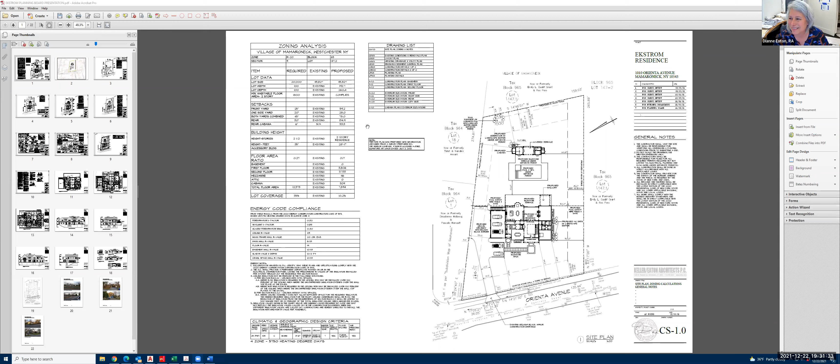So I'm the architect for the project, and my clients, Klaus and Cecile Ekstrom, purchased the property at 1010 Orienta Avenue.

We are proposing a single-family residence, a 2-story residence with a 1-story cabana. The house itself complies with all the Village of Mamaroneck zoning requirements in terms of setbacks, height, and floor area ratio.

Lot coverage. The property itself also came with certain covenants, which I did include in our submission. The first is that all structures have to be 50 feet off the right side property line. We need the front to be a minimum of 35 feet off Orienta Avenue.

There's a lovely stone wall with piers along the front on Orienta Avenue, and we could not touch or disturb those. So those kinds of parameters dictated the layout of at least a portion of the overall house.

So we ultimately kept the stone piers where the curb cut was and entered into this side of the house, which pushed the garage over on this side with the rest of the residence spilling out after. We have a bluestone terrace in the rear.

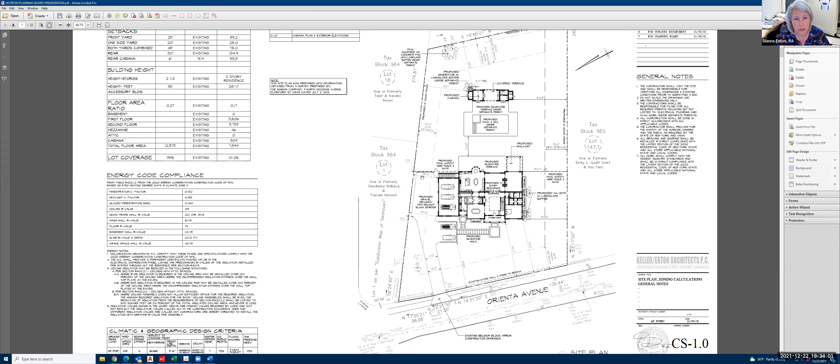I think I'm just going to keep going through the plans. We have Justin from Langan here if we have more specific questions. This next sheet is just an area map—highlighted here is the property we purchased in question.

Here is the proposed layout of the building with cabana. Just to give a sense of where the other houses are situated along Orienta, we are much further back than most of the homes along Orienta Avenue. We felt that was important given the property.

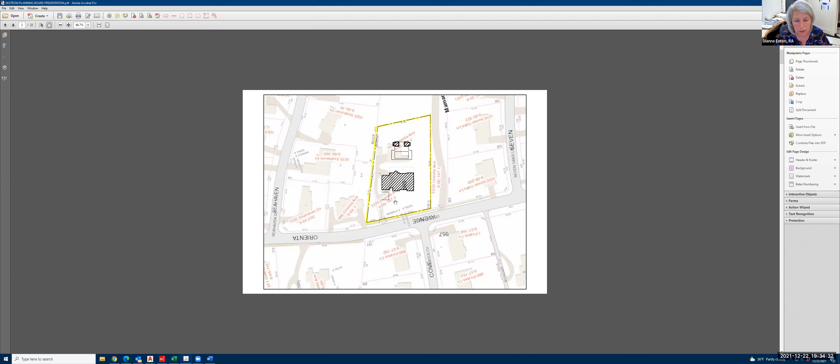Moving into some of Langan's drawings, which I'll give a brief overview of, and any specific questions can be directed towards Justin. This talks about some demolition work and grading that would need to happen. I'm just going to go down to the next page.

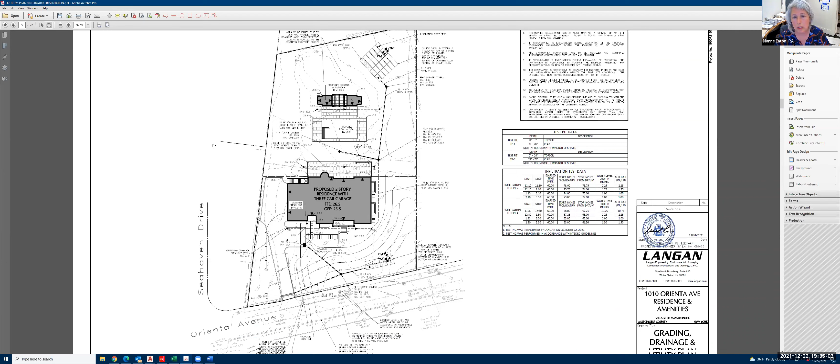We ultimately have—just going to keep going—this is for amenities and layout. This next one is a little more to the point about how we're going to capture any of our hardscape and roof leaders, et cetera.

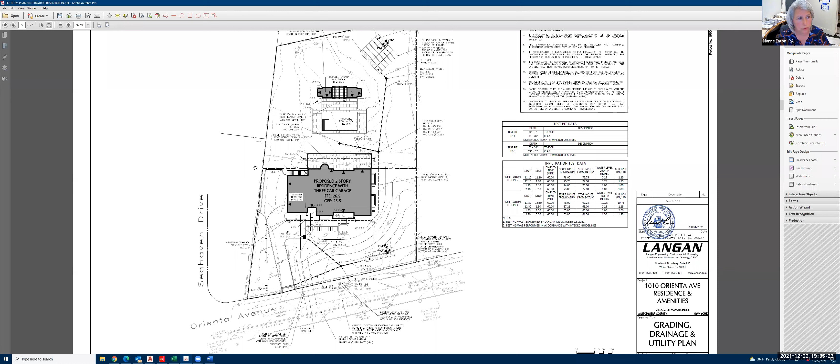We have 2 underground infiltration systems: a smaller one towards the front, which picks up the driveway surface water, and one in the back where we start picking up the roof leaders. I'm just going to keep going through the process here—a little bit more information there and contours.

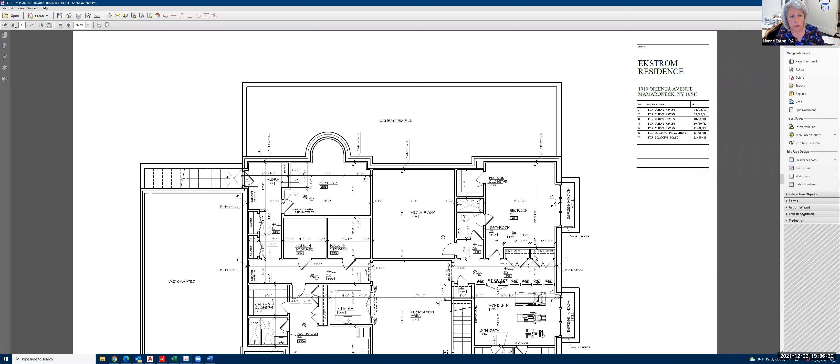The overall layout of the house—I'm just going to scoot up. There is a finished basement beneath the first floor, which has a media room, kind of typical for this area, media room, gym.

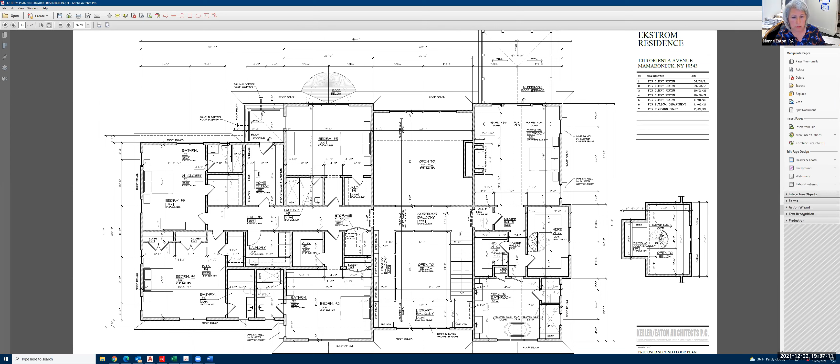On the second floor, all the bedrooms have a balcony overlooking some of the first floor spaces. And then I'll just get to the elevations.

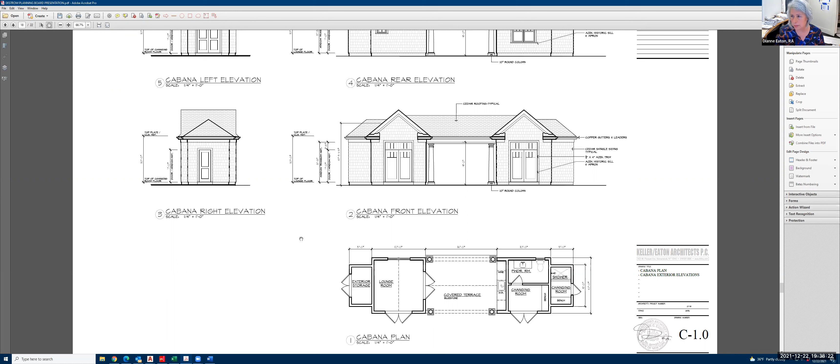And that brings us to the Cabana elevation, which is the one-story house in the rear of the property. They were very interested in keeping the pool and the cabana kind of more central. Everyone likes to make sure the pool is completely guarded and screened, etc, just so neighbors don't object to any kind of noise and along those lines.

I think that's all I have for you today. That's just a survey and some photographs of that wall we were keeping, lovely wall, and just some of the neighbor properties. This is the house to the left, this is kind of the side view of the house to the right, and just some neighbors across the street. Love to take any questions.

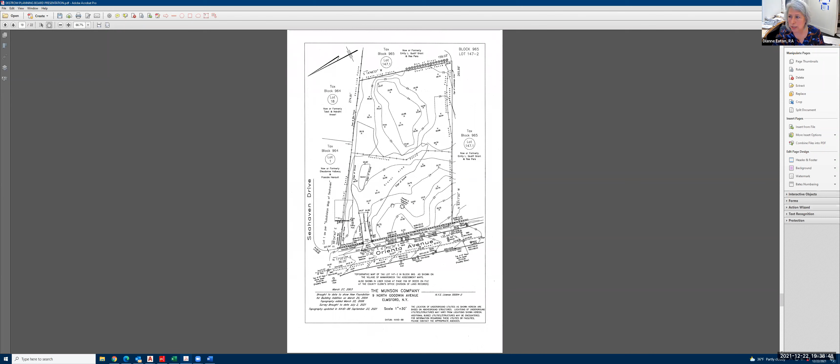Maybe the engineer wants to give a little bit of detail. Brittany, could you disable the comments, please?

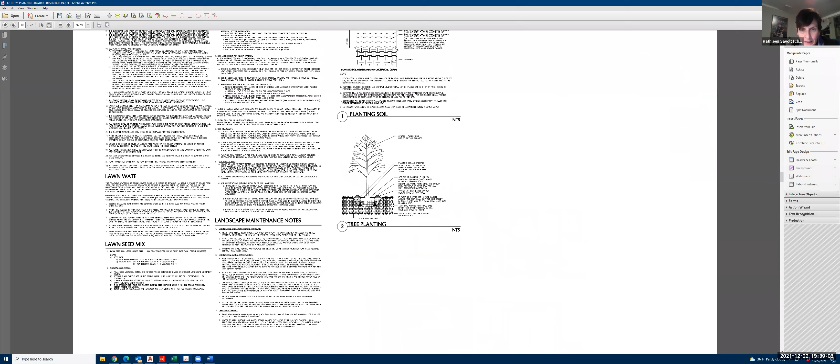I'm sorry, Gail. We're not at that level of detail at this point in time. We'll get there.

Okay, I'm going to just scroll back to the... yeah, if Justin from the civil engineer can do a little bit about the stormwater management system.

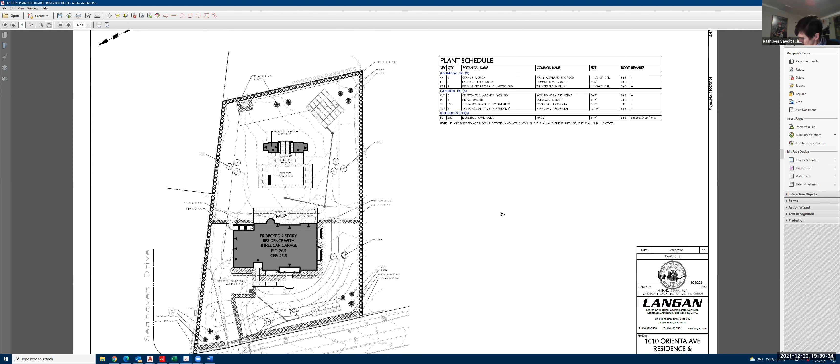Sure, can you guys hear me okay? Yeah, all right, let me try to. Justin, do you have a last name? Yes, my last name is McAlintal from Langan Engineering. Thank you everyone for allowing us to present today, this evening.

Just to provide a little bit more detail on the stormwater management for this project. Like Dianne mentioned, we're proposing two underground infiltration systems, one in the front and one in the rear. Most of the impervious surfaces from the property will be focused on the underground chambers in the back. We did perform field testing on the site to verify that the infiltration rates and depth to bedrock and existing groundwater do comply with DEC requirements. On this project, both of them do. We have the required depths, and the infiltration rate exceeds the minimum half inch per hour.

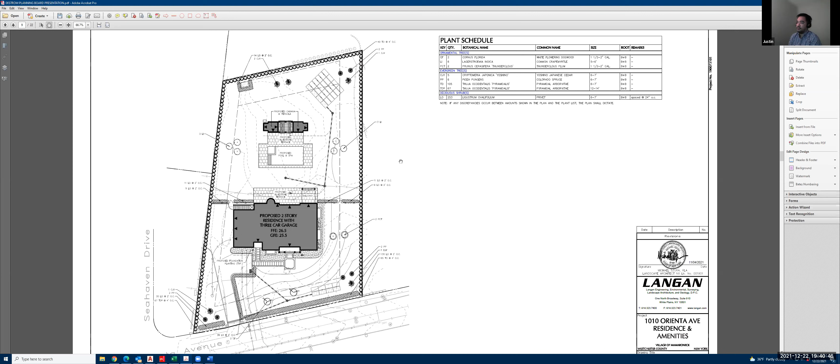Generally speaking, from a peak flow rate standpoint, our post-development conditions meet the existing peak flows, so we're not generating any more surface runoff that'll be leaving the site than what's currently existing. So in other words, you're not going to increase any runoff from the site than what's currently there? Correct, we're not proposing any increase in surface runoff. That's the purpose of the underground system.

We've gotten some written comments from the neighbors that since the vegetation on the property was removed, there's been an increase in runoff from the site onto their properties. So it's one of the concerns with regards to this project.

If I could just clarify one point, my client purchased the property as is, as it currently stands today. So they were not the people that cut down the trees? That is correct. Okay, so I think that's an important part, in case there are questions along those lines, we really couldn't answer that, because this is how my client purchased the property. Okay. Well, I think we heard rumors to that effect, that they weren't the owners at the time who cut down all the trees. But they have to address the fact that all the trees were cut down, even though they're not the ones who did it. Okay, just so you know.

Okay, yeah. I mean, if you look at the village code and what the requirements are for a site plan and what the considerations are, obviously the ecological considerations, the landscaping, the size of the lot, and the number of trees that can go on that lot are clearly going to be one of the issues that we're going to raise. I see. As well as the stormwater runoff, along with other things, how the house fits in and how the property fits in with the neighborhood. That's all part of the site plan review.

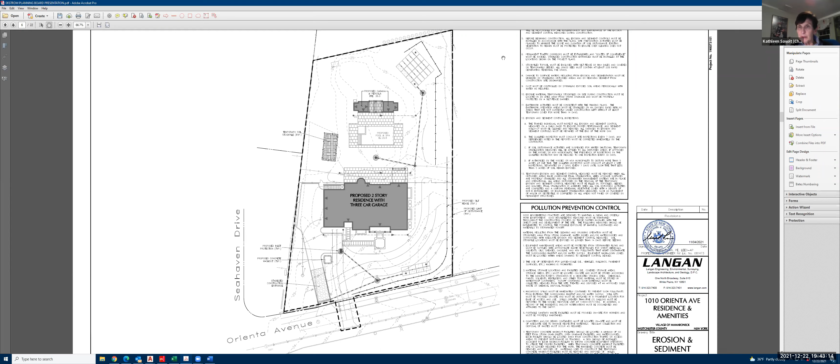I guess regardless of whether or not you received the comment, you will receive them. It doesn't really matter whether you got them or not. I just thought as the consultants' comments came in, they were being shared with the applicant, but okay, we'll get them to you.

But let's start with AKRF. I don't know if you have anything you want to say in the beginning as we begin our review, things you want to point out or bring to the attention of the planning board members and the public.

Sure. As the chair said, this is the first time this applicant is before the planning board. The only recommended action for tonight is to type the action under SEQRA. Because this is a single family home, it qualifies as a Type 2 action, so that's the recommended classification for tonight.

However, there are a number of comments from the village engineer as well as the village's landscape architect that need to be addressed before this can get to final approval. Given the concerns we've seen from the public so far, I'm recommending the planning board schedule a formal public hearing. It's optional for a project of this size, but given the interest, I'm recommending one be scheduled.

The comments outlined in my memo were related to compliance of the project with Chapter 300 of the Village Code, which summarizes all the necessary features that need to be included on your plans for a pool. I'll make sure you get a copy of that. Many items have already been addressed, but there are a couple that need clarification.